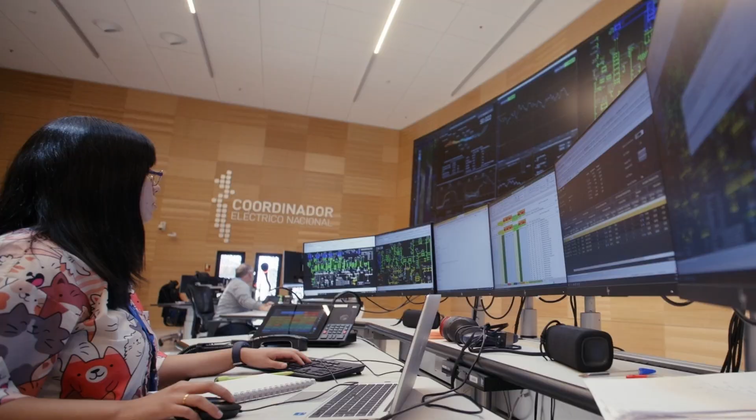Welcome to the National Energy Dispatch Center, CDC, of the Coordinador Eléctrico Nacional. The Coordinador is a technical and independent organization in charge of coordinating the operation of the facilities of the National Electrical System that runs between Arica and Chiloé under the principles of secure operation at minimum cost and guaranteeing open access to the transmission system.

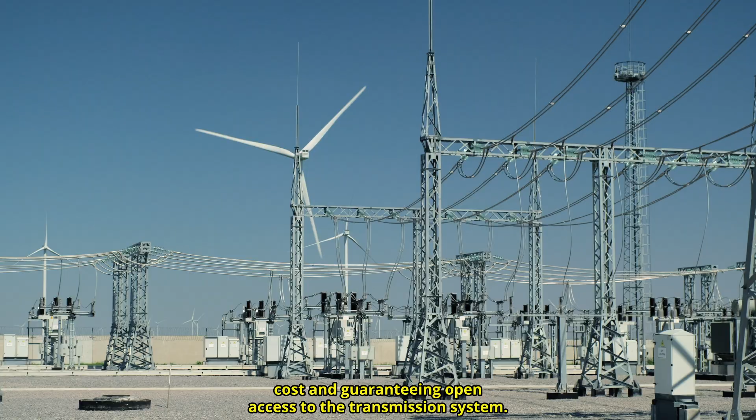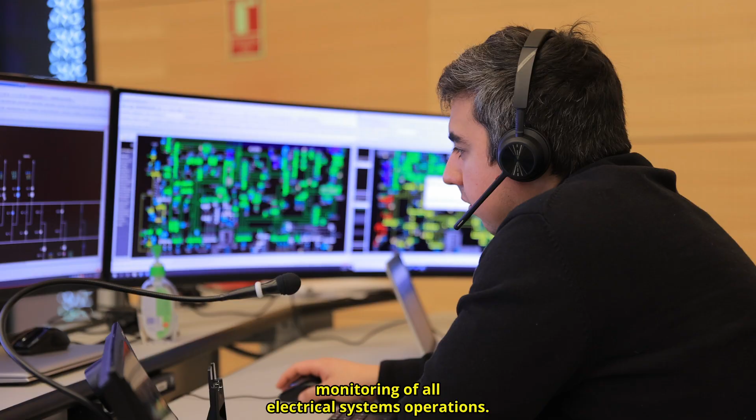You are at the Energy Dispatch Center, a place that has cutting-edge technology for continuous and permanent supervision and monitoring of all electrical systems operations. In front, there's a 100 square meter video wall, which began operating in 2022. The CDC operates 24 hours a day, 365 days a year. Its team is made up of 8 roles.

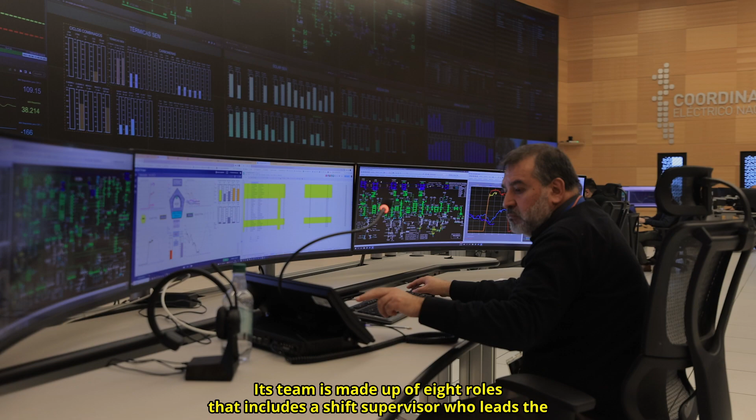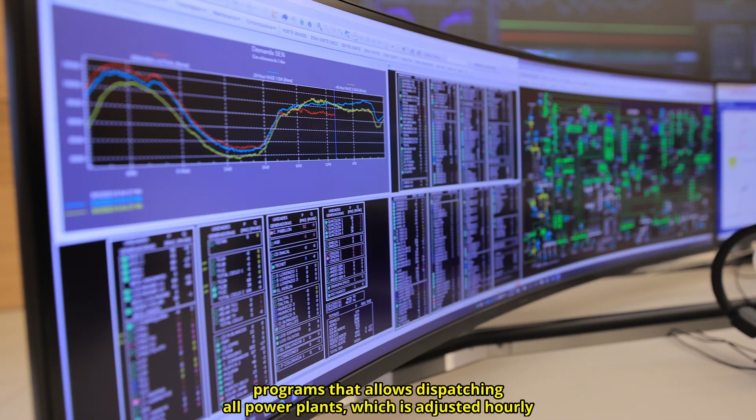That includes a shift supervisor who leads the operation, dispatching engineers who have different roles, from supervising generation and transmission to overseeing reliability aspects of the grid, and a role to manage intraday programs that allows dispatching all power plants, which is adjusted hourly according to changes that occur in real-time operation.

From left to right, the first information the video wall presents is a geo-referenced system that displays forest fires that approach electrical installations and which, depending on the events that may occur, allow us to make operational decisions in coordination with those responsible for the affected facilities.

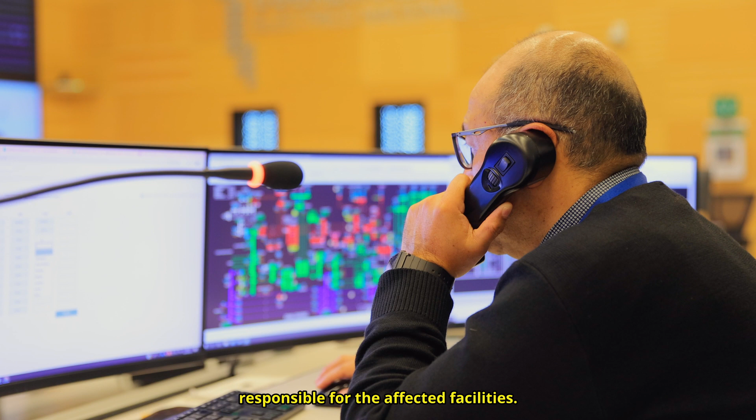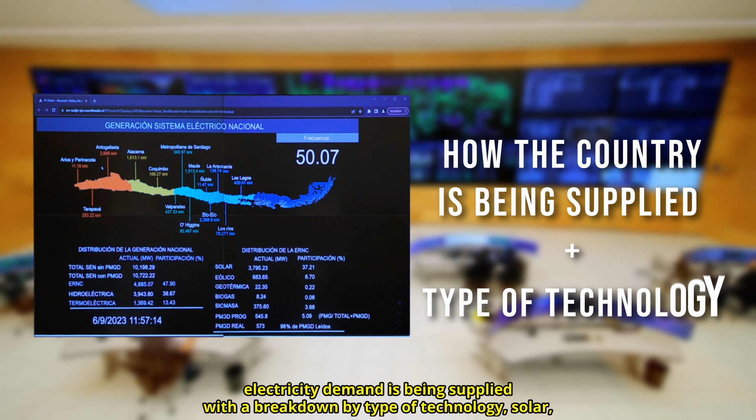The second panel shows a map of the country with a general display of how the country's electricity demand is being supplied with a breakdown by type of technology: solar, wind, biomass, hydraulic, thermal, and other small distributed generation resources. Then you can see 4 charts showing daily energy profiles by generation type.

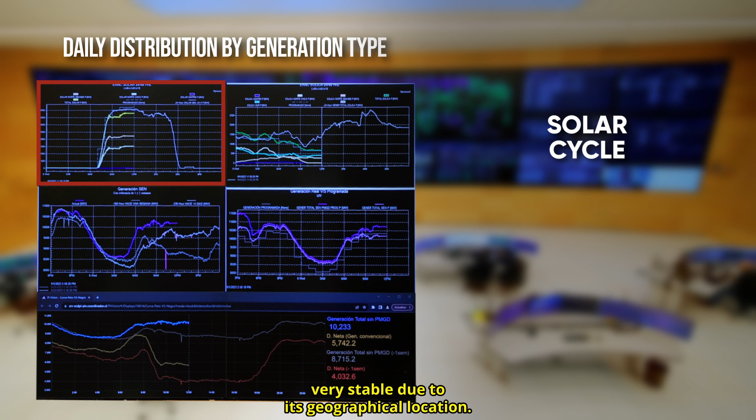The first one shows the solar generation profile, a resource that is massively deployed in the northern part of the electric grid and is very stable due to its geographical location. The yellow lines show the total contribution minute by minute, and below, the share of generation in the northern zone and the rest of the country.

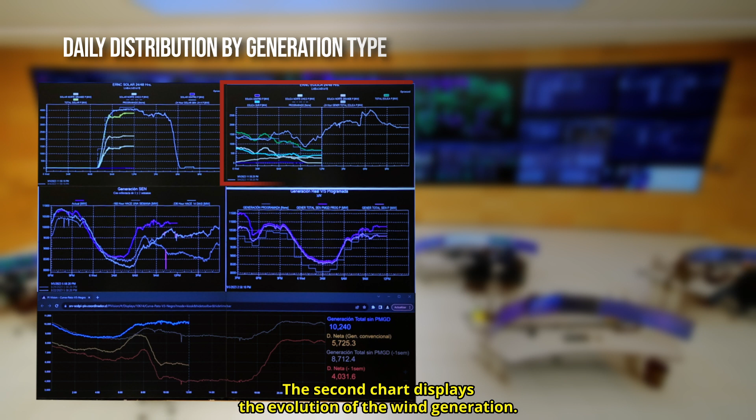The second chart displays the evolution of the wind generation. The biggest challenge we have seen with the wind resource is the high variability it presents during the day, which is addressed by performing comprehensive generation forecasts and making use of flexible resources from the rest of the generating park.

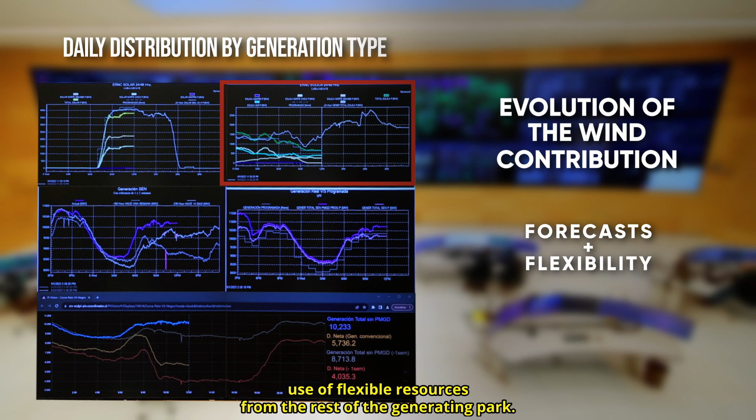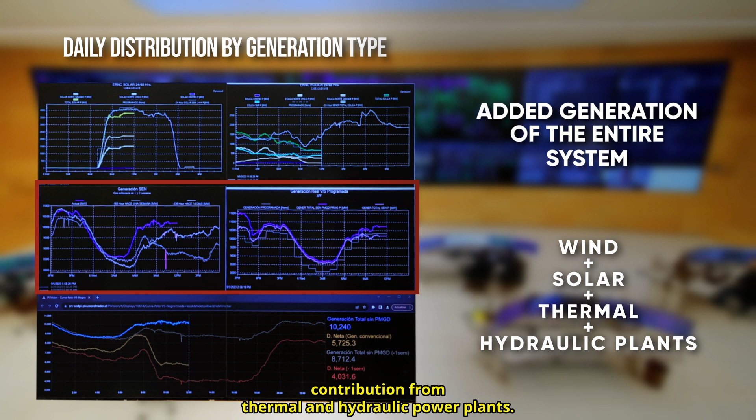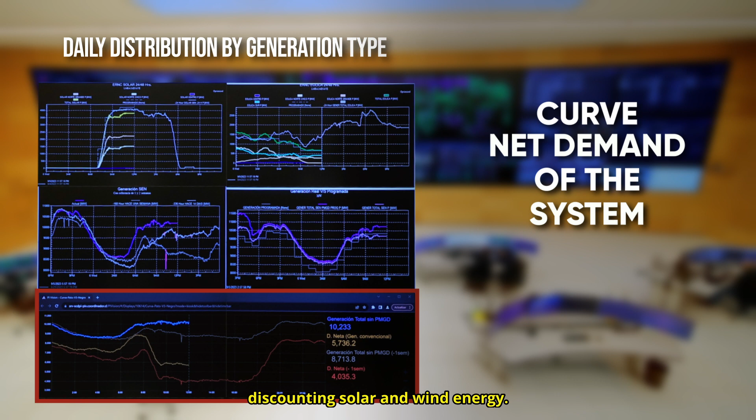The curves below show the aggregated generation for the entire system, the sum of the wind and solar generation, and then the contribution from thermal and hydraulic power plants. Finally, you see the curve that shows the net demand of the system. This net demand corresponds to what is required to be generated to supply the total demand, discounting solar and wind energy. When the sun sets, the generation ramp can reach up to 5,000 megawatts in about 3 hours, almost 50% of the total system's peak demand.

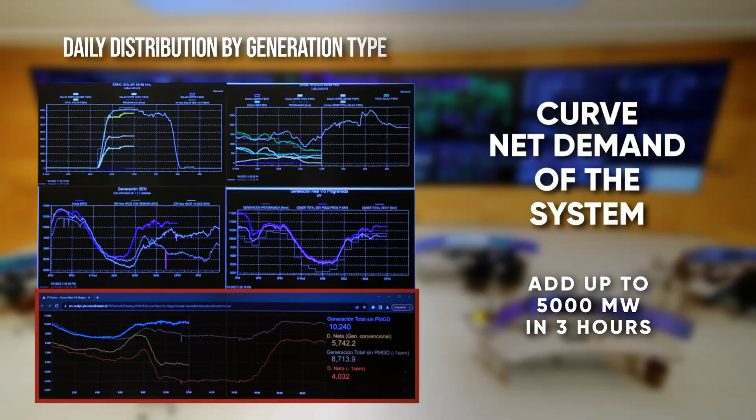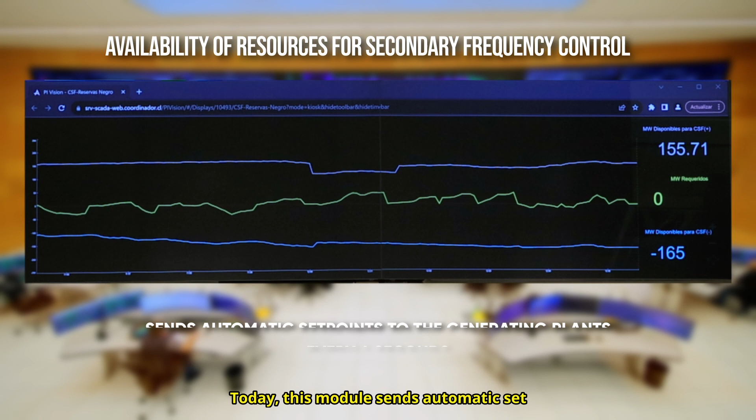This is supported by this chart, which shows the availability of reserved resources for secondary frequency control. Today, this module sends automatic set points to the generating plants every 4 seconds, which allows the frequency to be within the ranges established in our grid code.

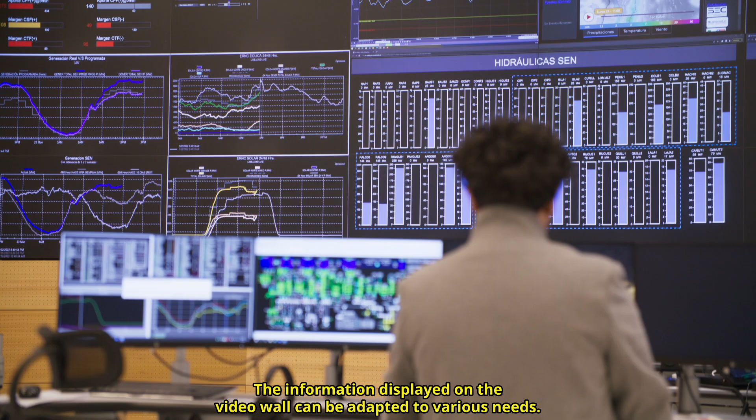The information displayed on the video wall can be adapted to various needs. For example, this chart shows the power oscillations resulting from changes in the configuration in specific areas of the grid, and those are monitored in order to make timely decisions in the event of possible contingencies.

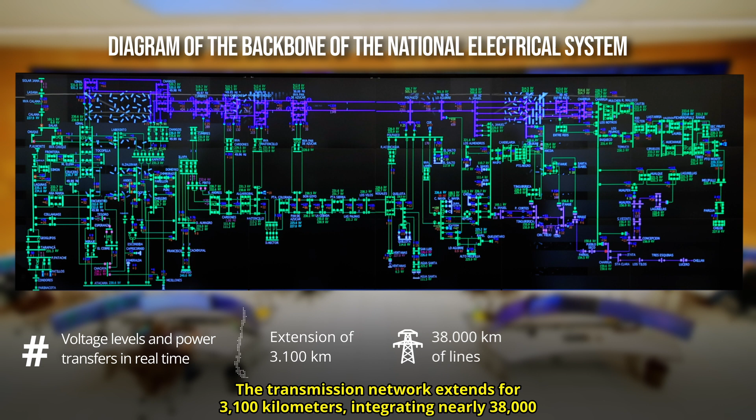In the center of the video wall, you can see a diagram of the backbone of the National Electrical System, that is, the most critical high-voltage transmission lines. The diagram shows the voltage levels and power transfers in real time. The transmission network extends for 3,100 kilometers, integrating nearly 38,000 kilometers of lines from Arica to Chiloé with different capacities and voltages.

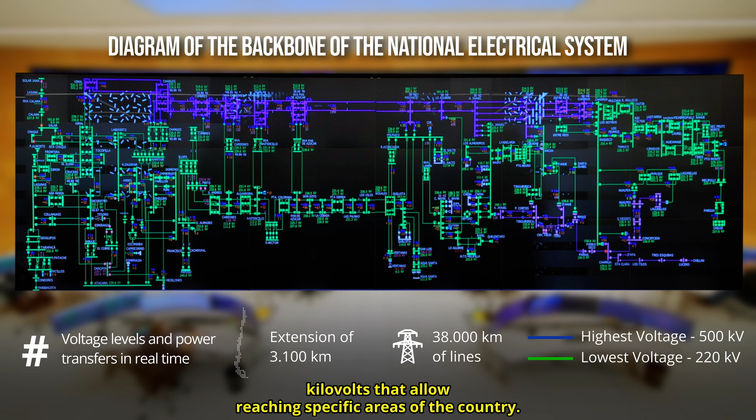The blue lines correspond to the highest voltage level of 500 kilovolts. The green lines correspond to lines of 220 kilovolts that allow reaching specific areas of the country. There are other colors that represent lower levels of voltage in specific areas. Dispatchers can zoom in on their consoles to see what they require in greater detail.

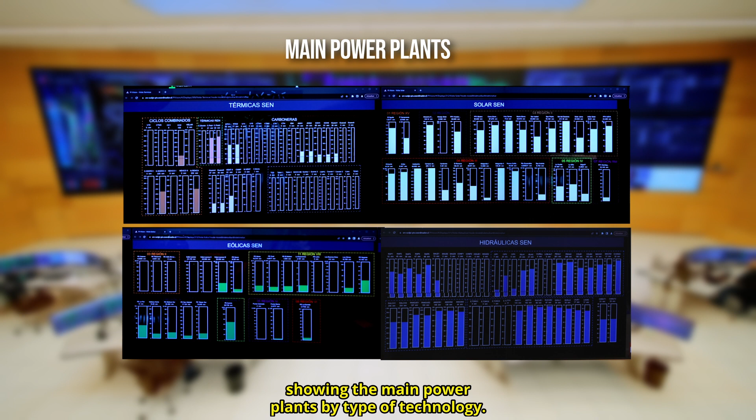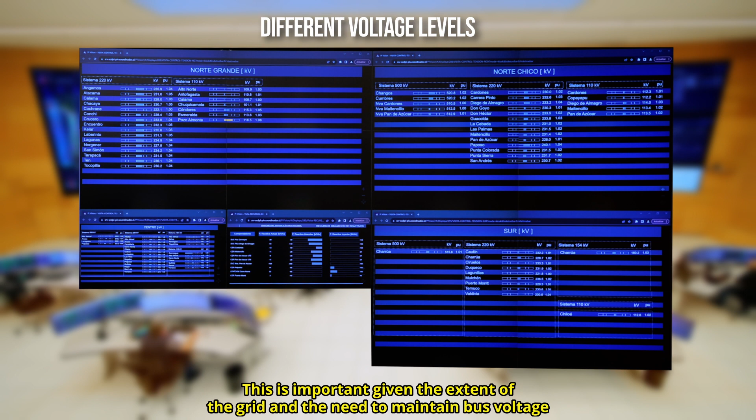Then you'll notice a display with bar charts showing the main power plants by type of technology: thermal, solar, wind, and hydraulic. This enables us to see the instantaneous generation for each of these plants. On the right are tables showing the voltage levels throughout the system, which allows us to have a real-time diagnosis to make timely decisions. This is important given the extent of the grid and the need to maintain bus voltage profiles within normal ranges at every time.

Finally, at the bottom, we maintain a news channel that provides information in real time and that can be useful for the operation, in addition to the evolution of the marginal costs of the system in different locations, which is the value at which electricity transactions are traded in the short-term energy market.

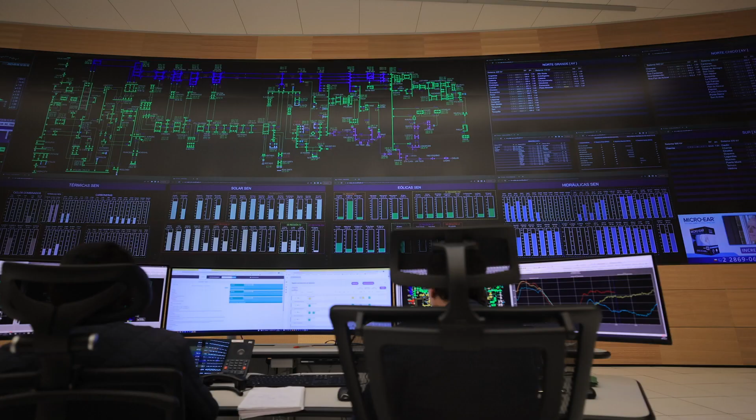This National Dispatch Center allows us to be prepared for the new challenges that the energy transition imposes with an experienced human team that is well-trained and equipped with cutting-edge technology.